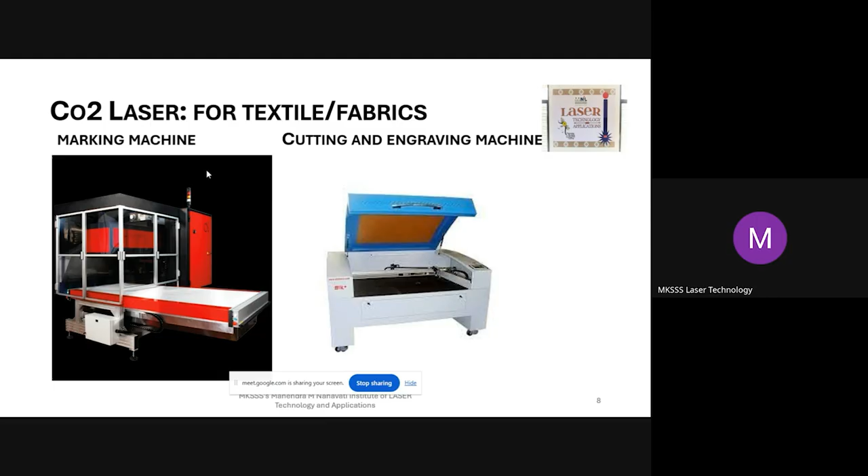I'm coming to the next application. First, just go through certain images. These are laser machinery available in India as well as other countries. The left one is an Italian machine and the other one is an Indian machine.

So this is how laser looks. It is a monochromatic straight line beam of light. Is it visible? Hello? Yes ma'am. So laser light looks like this.

It is a straight line beam, and you can see a variety of colors also. That color, technically speaking, is related to its wavelength. I'm not going into the detailed technical part of the laser beam, but just go through it. Laser beam is like that, and these are the machinery.

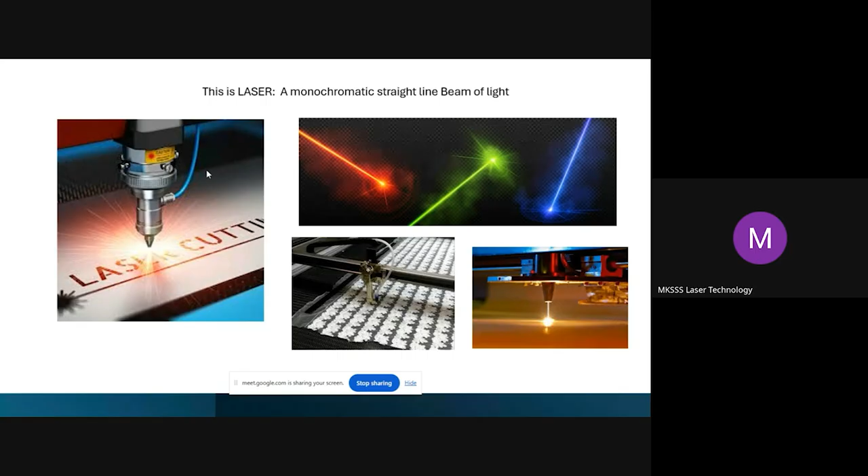This is a beam. So one by one, in the next slide, you will find a variety of applications on a variety of materials. Next part is variety of applications of lasers.

Now for the fashion industry, mainly we deal with laser cutting as well as laser marking and laser engraving. I'll show you what is laser cutting, laser marking, and what are its day-to-day applications in the fashion industry.

First of all, you all deal with a variety of textiles. So what different types of textiles can laser work on? This is a list of textiles or fabrics. It works on linen, silk, cotton, viscose, satin, lace, fleece. Specifically, it works best on denim, felt, and Velcro. So it works on natural as well as artificial fiber also.

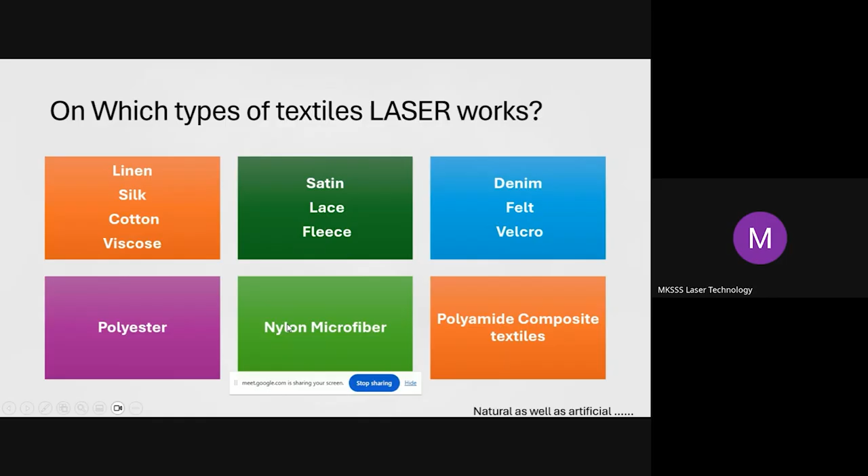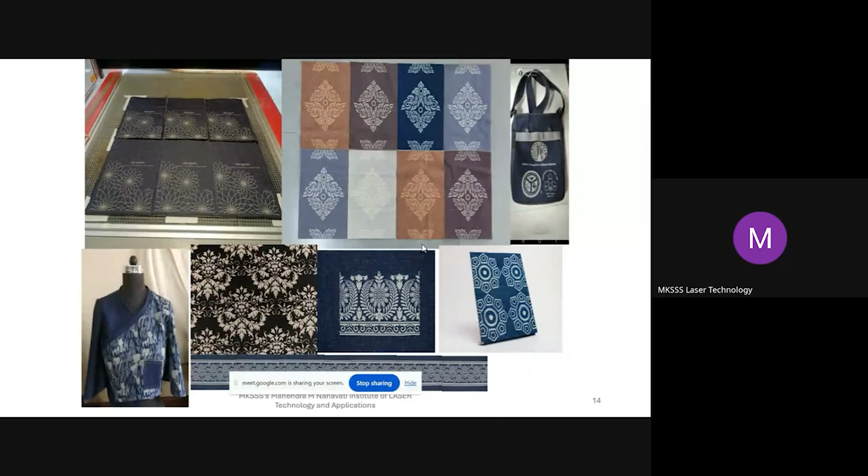So this is about denim. If you just see such kind of bleaching and vintage effect, it is possible because of laser application, and there is again no chemical use. And if you just see in the image, there are a variety of shades. This is possible to achieve due to laser application. As I said, laser is nothing but burning, so that burning from 0% to 100% you can easily achieve by adjusting machine parameters.

So just see the next image. As it is an eco-friendly or non-chemical process, with the help of laser it is possible to make banners also. So these are fabric banners.

Now I'm moving to the next application, which is laser cutting. We have seen laser marking previously, that is just the superficial part. Now this is directly next, laser cutting. Laser cutting is also possible on papers as well as on fabric. This particular image shows you laser cutting application.

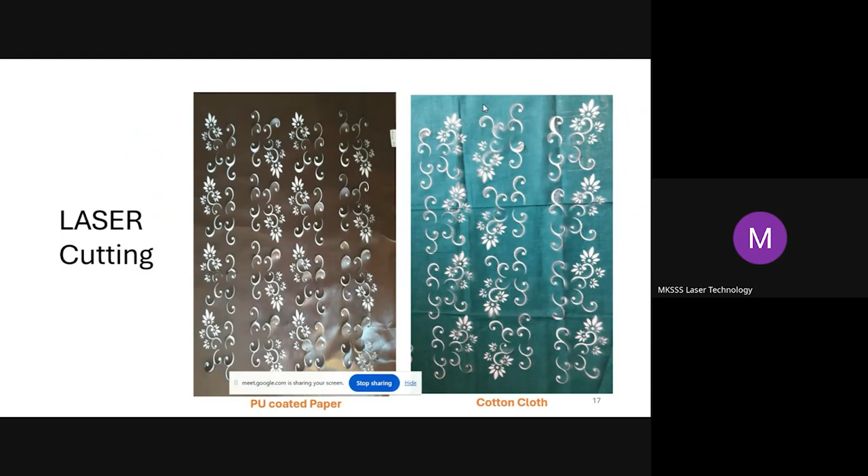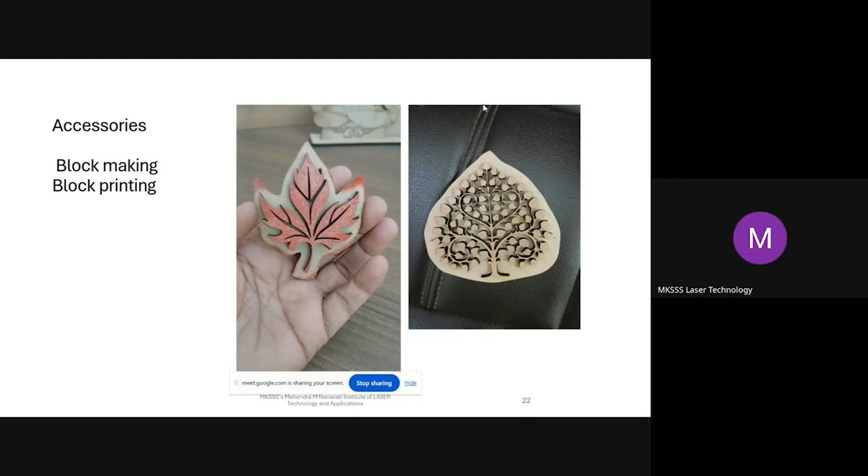Another application: after laser cutting, it is possible to make accessories. For block printing application, we can prepare blocks, because laser cutting allows us to cut MDF, wood, and acrylic. So it is possible to make such accessories also, for block printing.

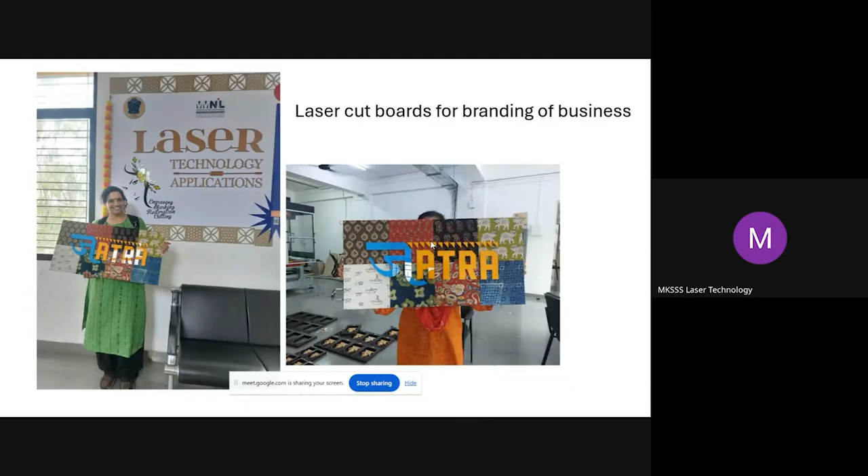Another thing is you can prepare boards, either denim banner or laser cut boards, for branding. This is also possible with the help of laser cutting. Here fabric as well as acrylic is used, and both applications, laser cutting as well as laser marking and laser engraving, are used while preparing this board.

Again, laser is nothing but burning of an object, but it is a controlled burning. So it is possible to work on paper as well as fabric, wood, MDF, rubber, variety of papers, and even clay. There are about 10 to 12 different types of materials on which laser can work.

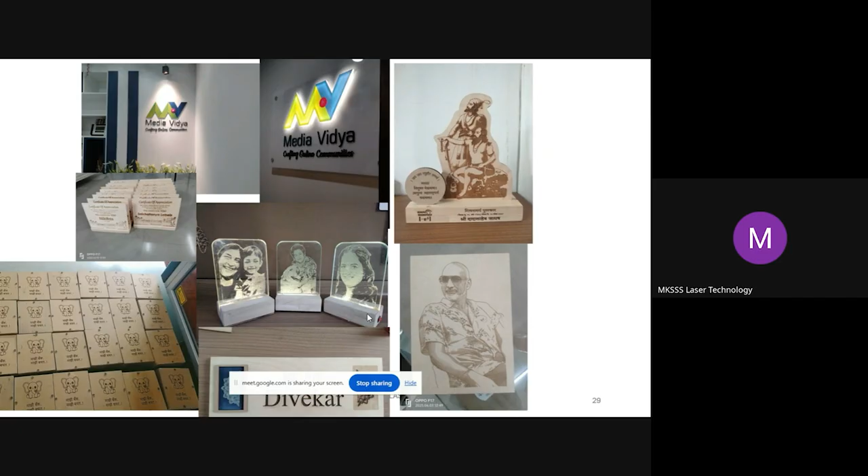Why am I showing all this? Because this is a possibility, this is innovation. With the help of laser, it is possible to work not only on metals, but also on non-metals.

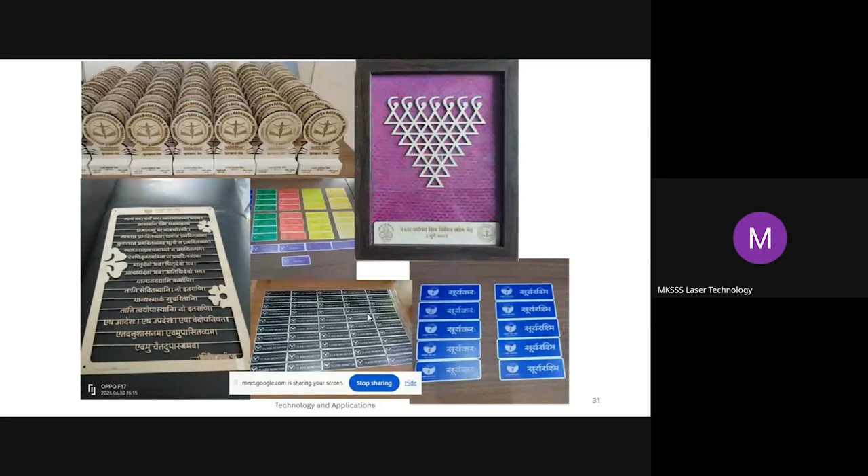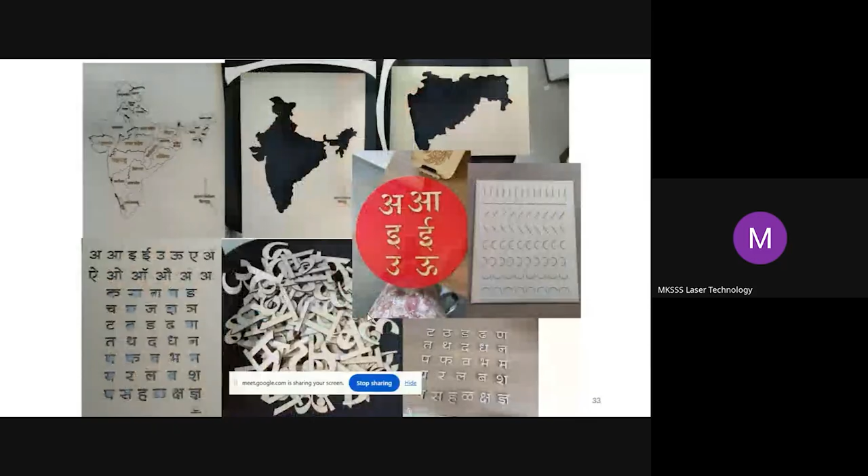Now I'm showing certain videos of how the machine works. One by one, just see the videos. If you just see, this is laser marking, which is what I showed in the previous images working on denim. So it is like this.

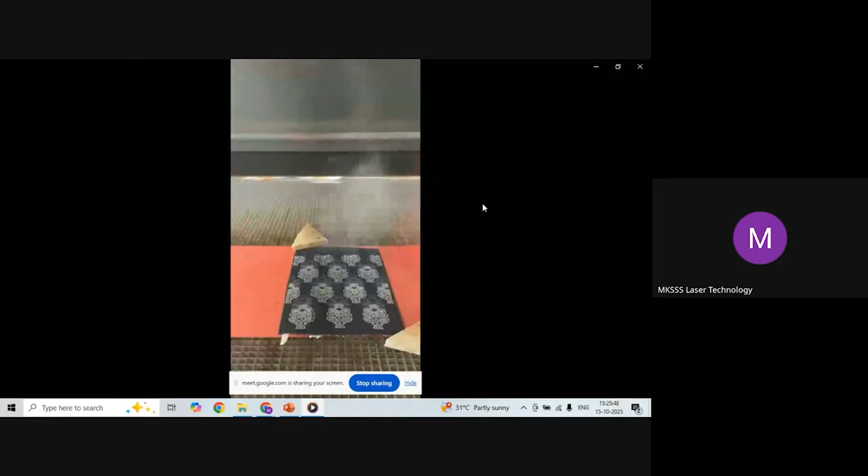So the denim work which you have seen in previous slides, it is like this. This is called laser marking.

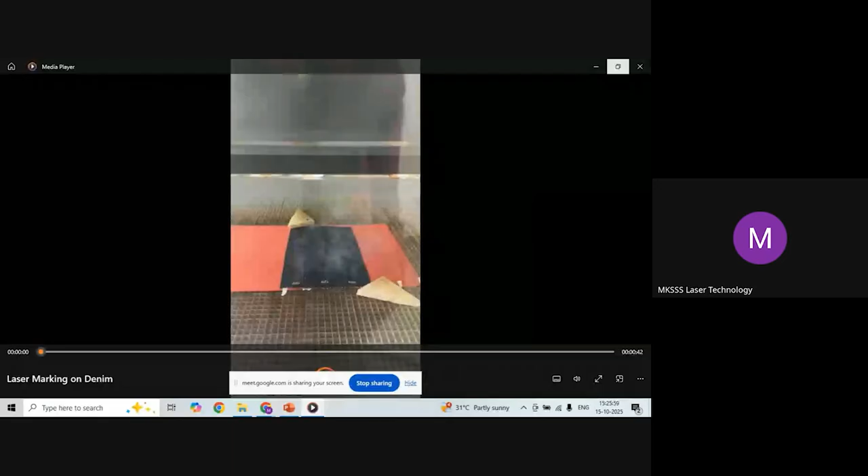Another video. So this is a big laser machine. It has a 4 feet by 8 feet table, and it is possible to work on this machine simultaneously for a bigger object, more than 46 inches.

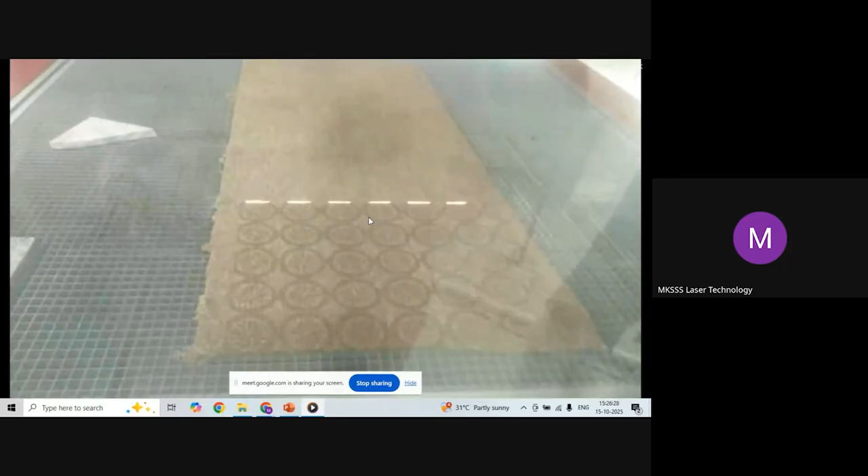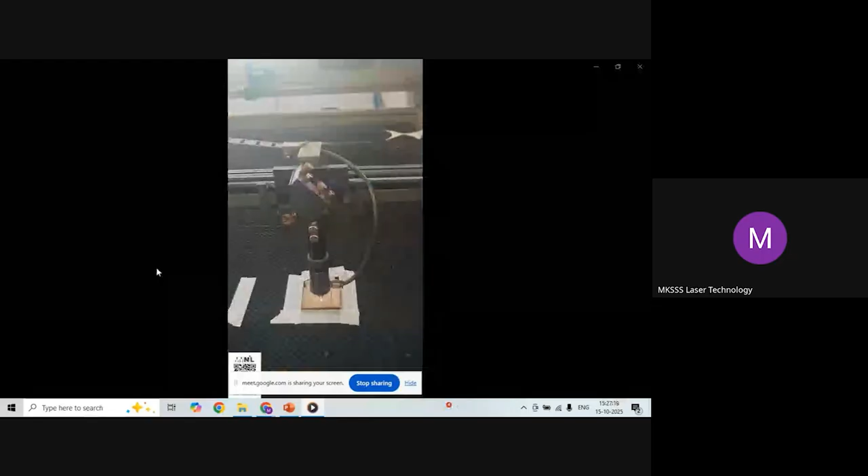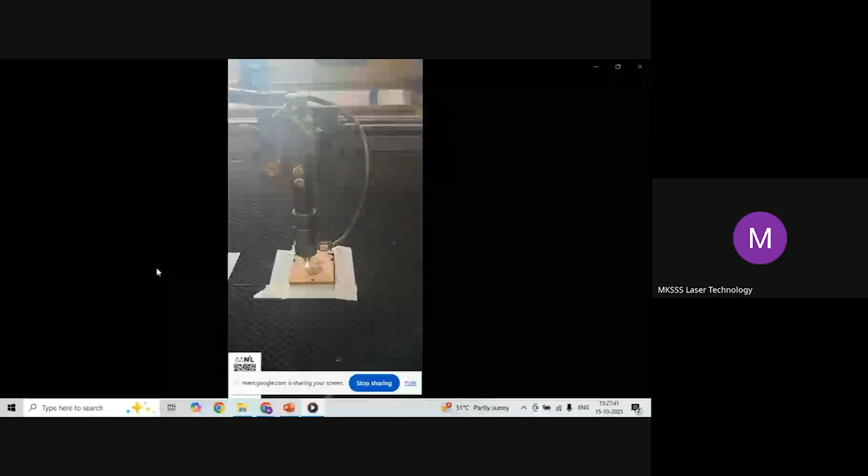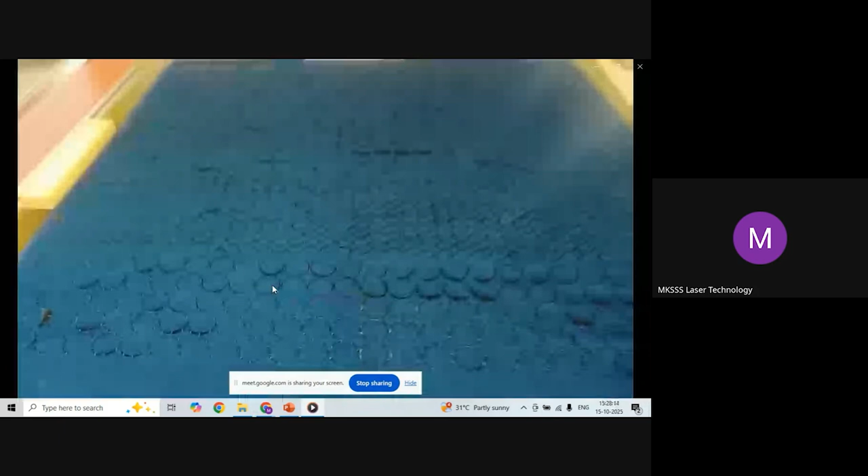Now this is laser cutting I am showing. So this is laser cutting.

So here I am showing you actual live videos about laser marking. Yeah, this is again laser cutting.

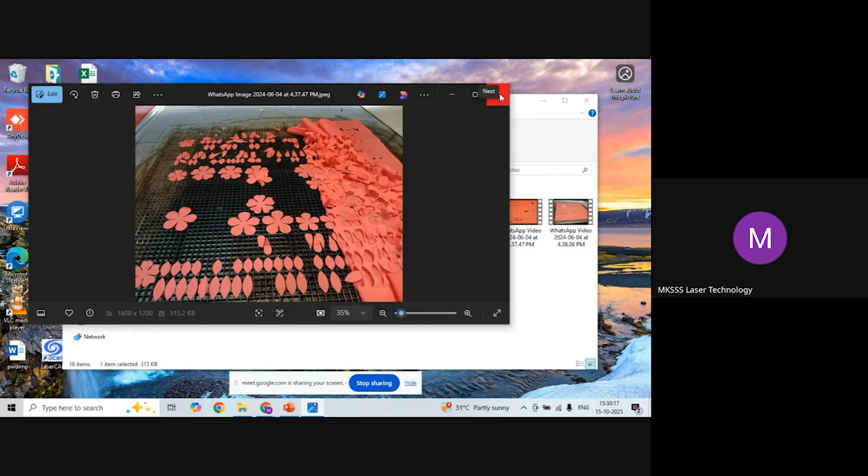So these are certain shapes. It is possible to cut fabric in a variety of shapes, whatever or however you want, or a variety of designs is possible. So these are certain videos of laser cutting and laser marking applications. Specifically, marking works on thick material like denim, and cutting is possible on any fabric, from cotton, denim, or any other fabric.

Now, another video I want to just share is... just give me a minute.

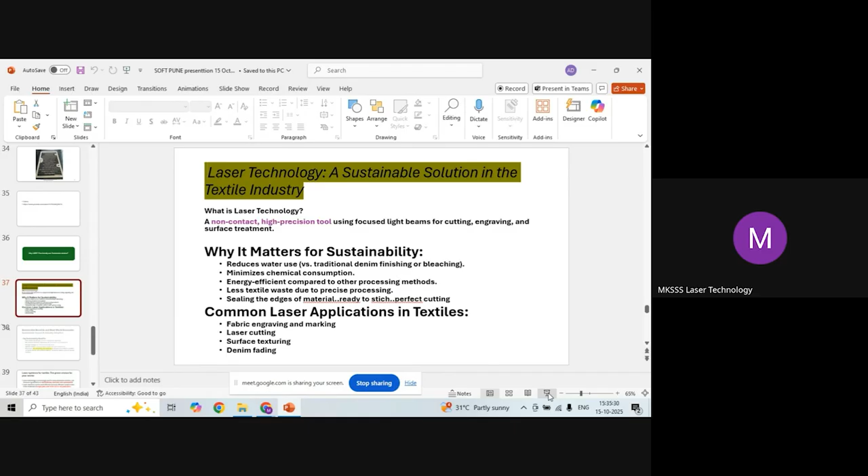Again, fabric engraving, marking, cutting, surface texturing normally done with the help of laser, and denim fading is another application used in the industry. So these are certain possibilities, and it is a sustainable option also. Similarly, it is also called a green choice for your sector.

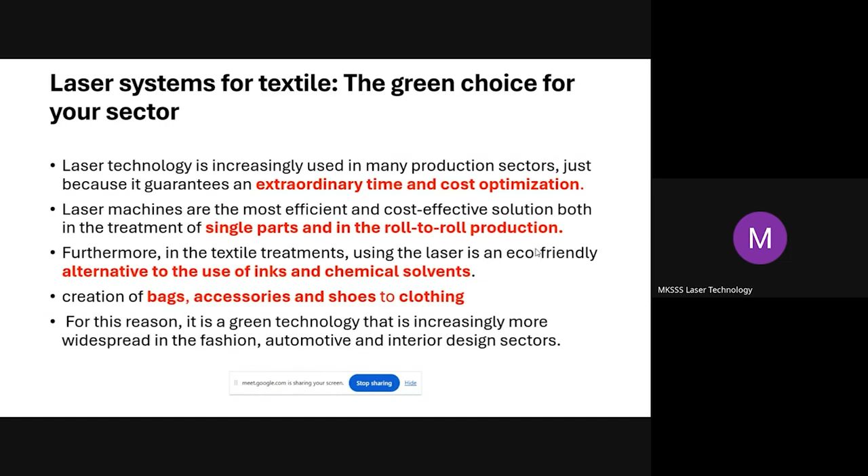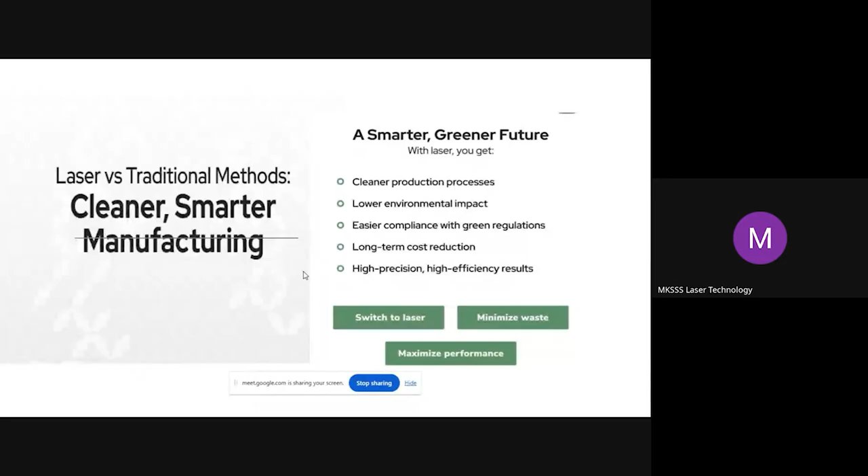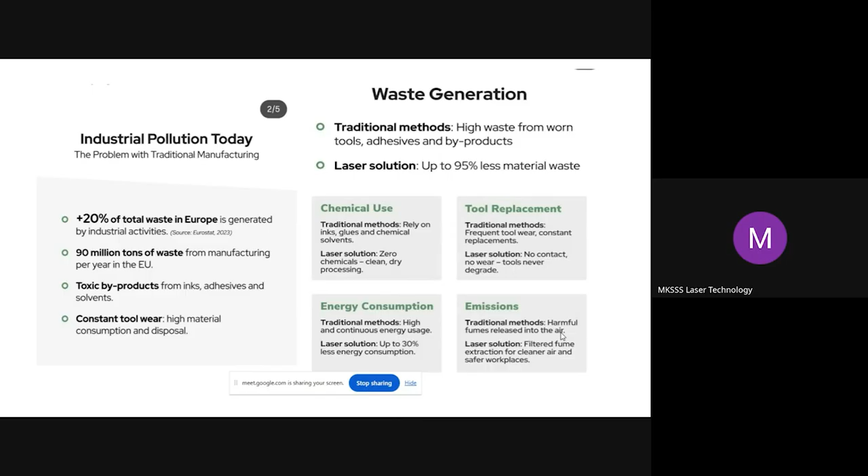So again, coming back to our department. Generally, as we have all technologies covered, we have CO2 laser machines, Nd:YAG laser machines, as well as fiber laser machines too. Based on these three technologies, we conduct a variety of courses.

Obviously these are short-term courses, like we conduct a basic course, which is basic design and laser application. Even we conduct product development using laser technology, and a very important one is creativity with laser, that interesting module also we conduct for students.

So there you can learn a variety of design aspects, as well as learn how to use the machines, what is the safety and maintenance aspect of that machine, and you can actually design and test or execute your file with the help of the laser machine and see how it works.

So mainly from a fashion designing point of view, you need to know how to prepare files ready for the laser machine. Generally, we need a DXF file, Illustrator file, or CorelDRAW software for use with these particular laser machines. We work on these three softwares to make machine-ready files.

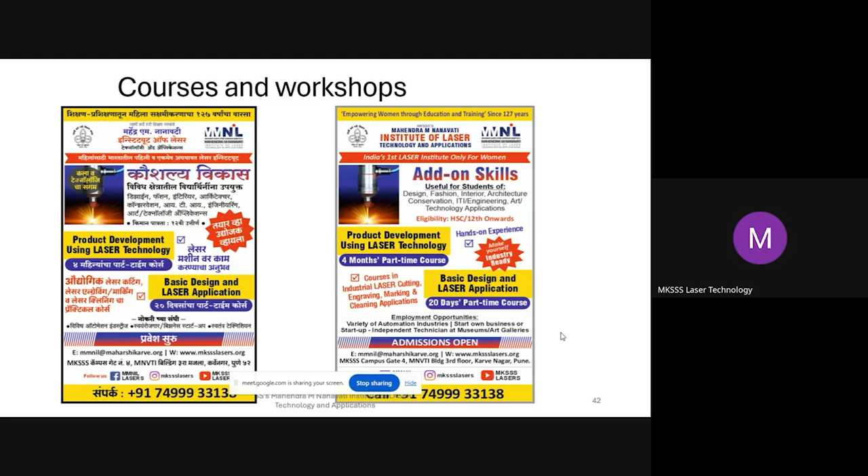And then we can cut, engrave and mark on particular objects. An important first step is always design. So whenever you come for making samples, we tell you how to prepare a design file first, and then later how to work on the machine. So this is about laser applications and laser systems, and their advantages over traditional methods. So this is all about laser things. Thank you, students. Any questions?

Ma'am, there's a question on my side. Is there any major innovation in laser cutting that has happened or is in the process of developing, for future designers to actually keep a check on it?

Just pardon, repeat your question. Are there any new innovations in the area of laser technology itself that are in progress or have already happened, that can assist the students even much more?

Basically, laser works on a variety of materials, from fabric to any non-metal, and size is also no matter, from minimum to a foot. So it is possible to work on small size as well as bigger size with the same machine. A previous important application is working on diamonds. It is also possible with the help of laser. So one application I can share is engraving your face on a diamond. This is also possible, so that is a new thing.